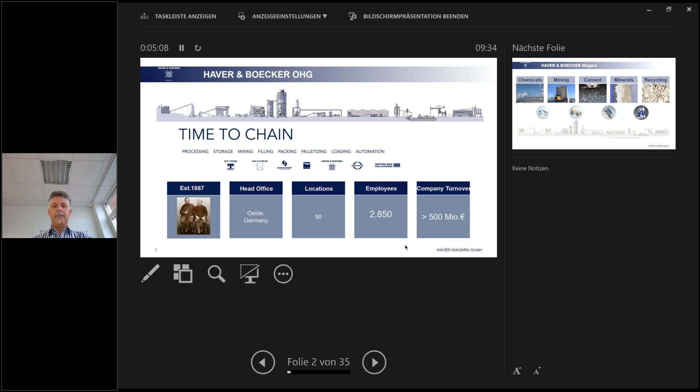We are working in the following areas: chemical and salts, mining, cement, minerals, and recycling. These are the main areas where we supply equipment for. Especially for chemicals, mining, and aggregates, we make this presentation today.

So we want to discuss a little bit about efficiency long time ago. This picture is probably familiar for some of you. We take it from our mathematics books at school. At that time, I asked myself, for what can I need this picture, or for what do I need this? Years later, now I understand why I need this.

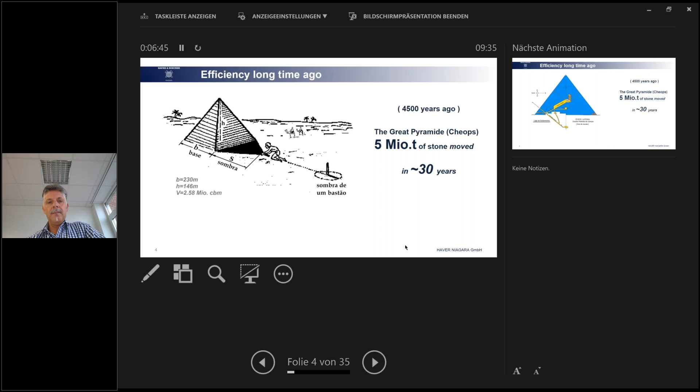4,500 years ago, people built in Egypt the Great Pyramid, the Cheops Pyramid. For that, they used around 5 million tons of stone. They made the pyramid in 30 years. This was really efficient for that time, because the idea was to make, let's say, like a cathedral for the pharaoh.

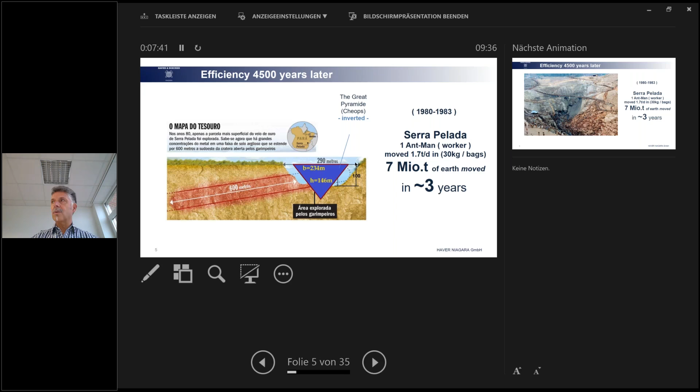4,500 years later, people make another type of cathedrals, let's say. When we take this picture and invert the Cheops pyramid, so it's to scale, the pyramid in that case - people in Brazil, in the 1980s, in 3 years moved the same quantity of material, even more, 7 million tons, in only 3 years. This was also another kind of efficiency, because they used the same tools like the people that built the pyramids - hands, no machinery, nothing. But then they created this big pyramid of material that they cannot use because they only wanted to have the gold. This was made in 3 years.

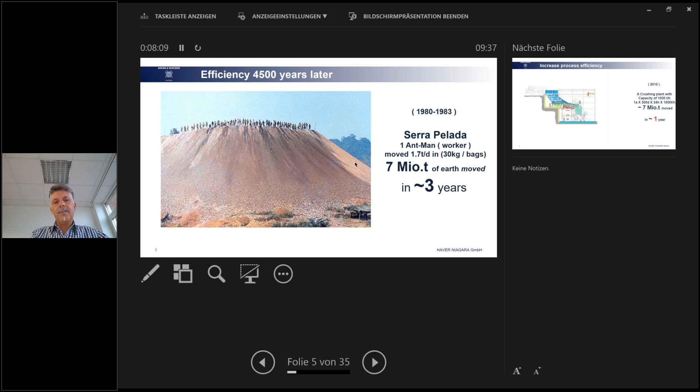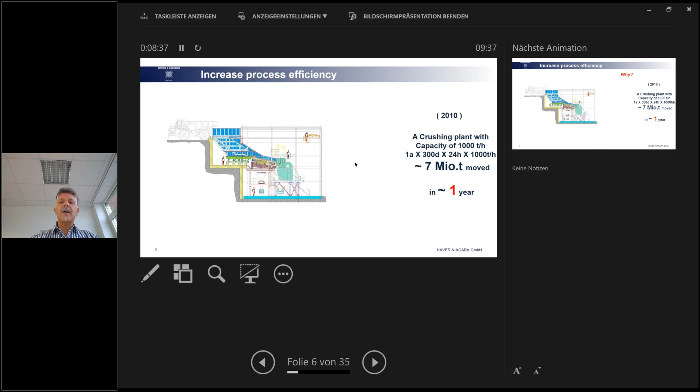Nowadays, we have another kind of efficiency. That means we have plants and machinery that move the same quantity of material in 1 year. So that means efficiency is higher, but we use less manpower and more machines.

Why do we show this picture? It's shown so that you can see that with these big amounts of material that we move, we also create big pyramids worldwide - not only in the Sahara, but also in the north part of the earth and in the south part of the earth. Even this is not a big plant, because 1,000 tons per hour is a small plant in mining scale, but for aggregates it's a big one.

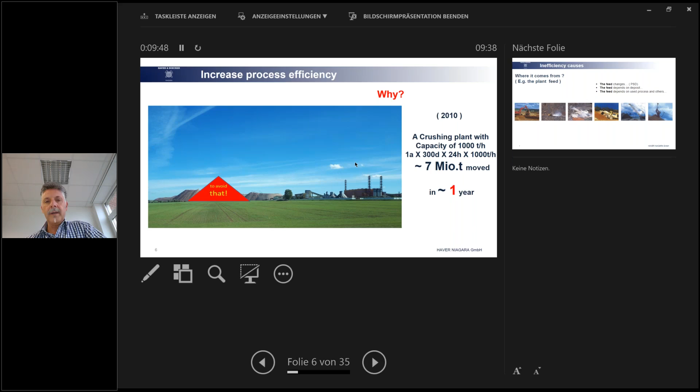So why do we want to increase the efficiency? We want to avoid creating these big stockpiles of material that no one can use. When we see these stockpiles, because we can do nothing with them actually, we have to ask why or where it comes from that the processes are so inefficient. What are the causes for that?

The causes normally come, part of them, for example, from the feed. Depending on the material that comes from the quarry, because the feed changes constantly, the mineral content of the deposits changes also constantly, and the use processes and others are also changing even during operation. This is the reason and causes why we have this big amount of stockpiles of unused material.

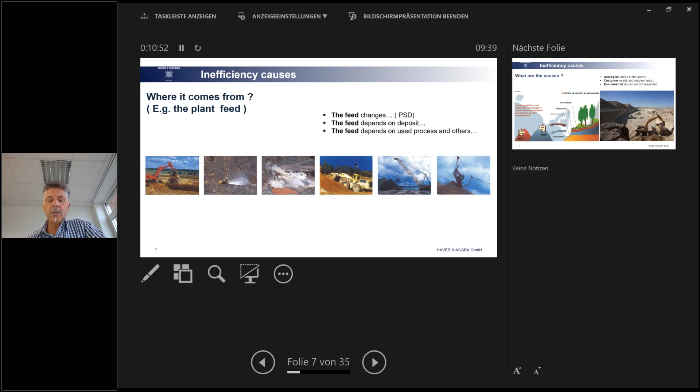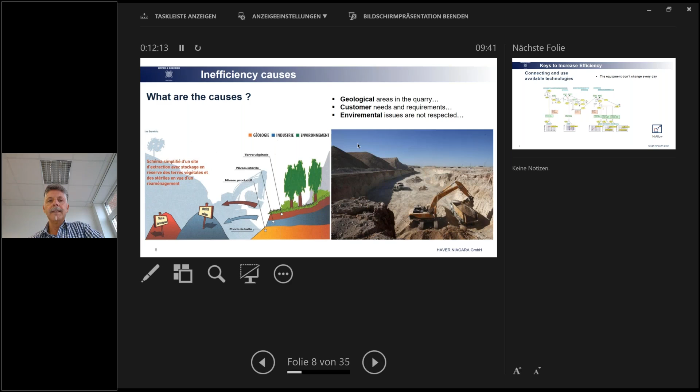So now we come back to part 1 and part 2. I don't know if you had the possibility to follow my colleague, Dr. Ruediger Heinrich, during the presentation of NIAflow. NIAflow is, for us, part 1, because there we show you how to select the machinery for your quarry. This is why we put this picture.

So to come back again - we have a system, a software to calculate the machines for your quarry: screens, crushers, feeders, and so on. The system gives out what materials you can expect to get from your quarry, of course considering your inputs to that.

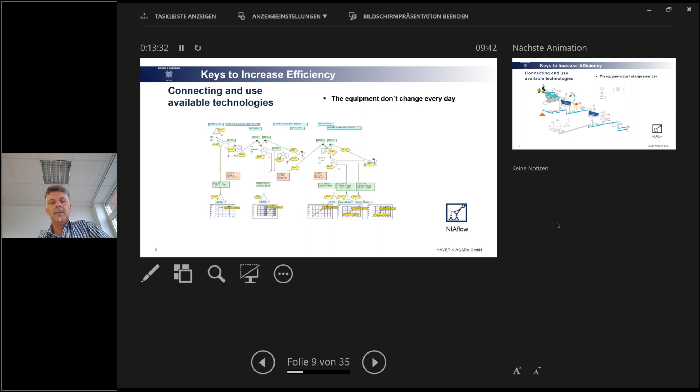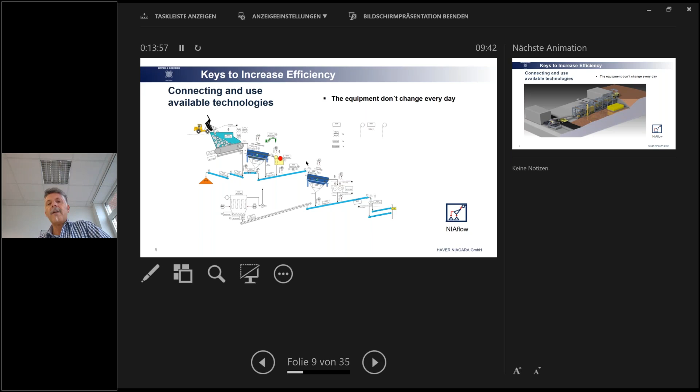After you choose your equipment and design your plant, you choose the right equipment for that - your trucks, your screens, your crushers, filters, conveyors, and so on. All this is equipment you choose when you build your quarry. So after it is built, or you design it, you make at that time the ideal process. You have the ideal quarry, you have the ideal equipment.

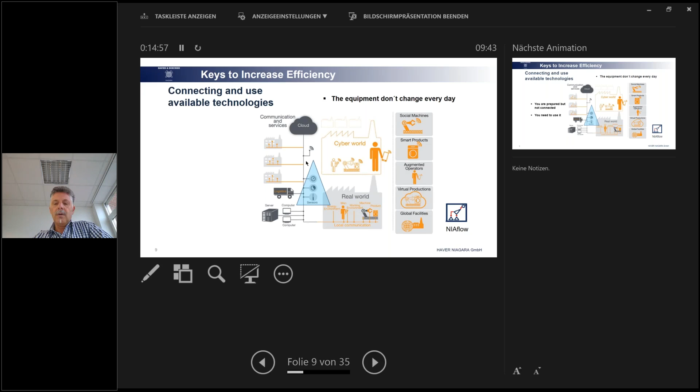So you don't change it every day, it is constant there. Now you have your equipment in your quarry, your feed, your geological issues, and you have a lot of components inside your equipment already installed that you don't use, for example sensors. This is the key we want to use to increase capacity and output of the quarry. So you are prepared but not connected, you need to use it.

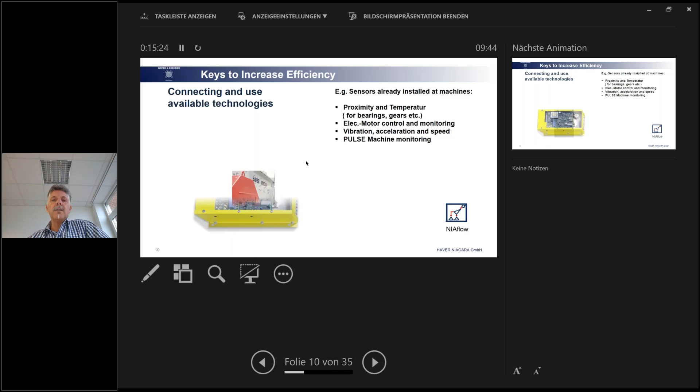What does it mean? When you buy the equipment, you get proximity switches, temperature sensors, electrical controls and monitoring for your machines. You get vibration, acceleration, and speed sensors. All these things you get with your new machines that you choose at the beginning.

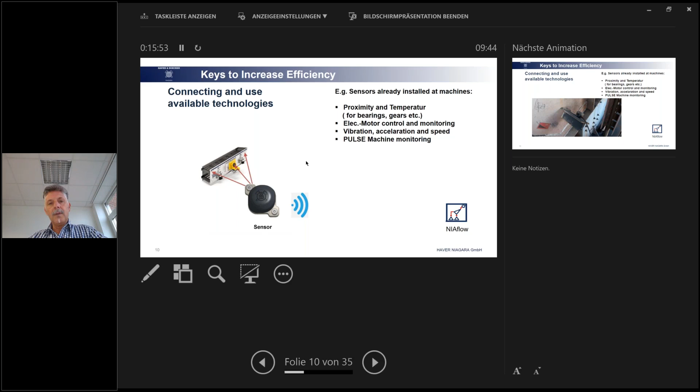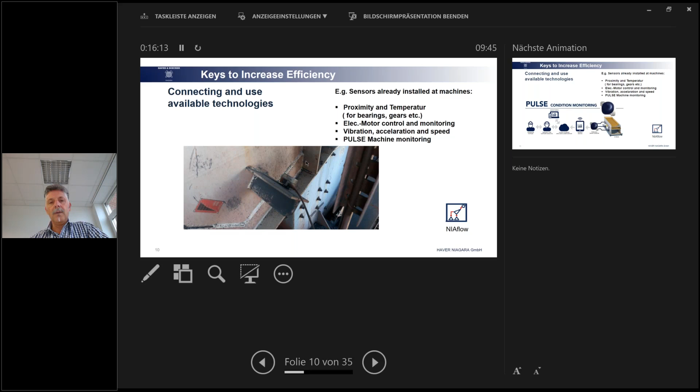Or even, for example, PULSE - this is a system from us, from Haver & Boecker. You get it, you put it outside. This is a picture of a machine running with such a system. So it is not something we only assume, people use it but only for one thing, only for example for vibration. But we can use it for more.

We can use it to increase the efficiency of your plant. How do we make that?

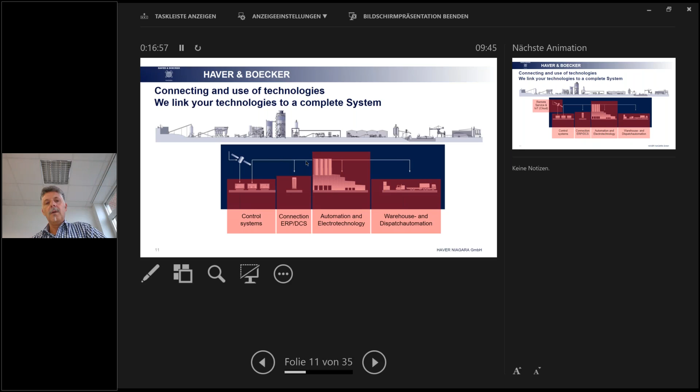Our experts from Haver Automation are able to connect all these installed sensors from your machines to a complete system, electrically, control systems. We can make it in dispatch, not only in the production area, connecting ERPs and DCS. And if the customer wants, we can make it also in remote mode, meaning using a cloud.

But I know clouds are sensitive things, so it depends if people really want to use it or not, because cloud is sensitive because of the data.

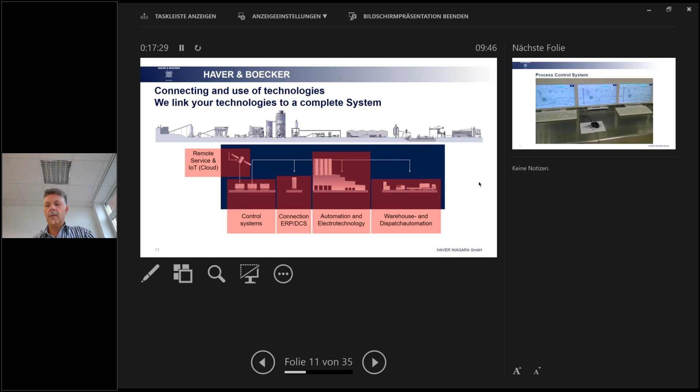So this is a picture that everyone of us sees when it goes in a production area. We see all the machines and what each machine makes on its own, but the machines don't, let's say, speak together.

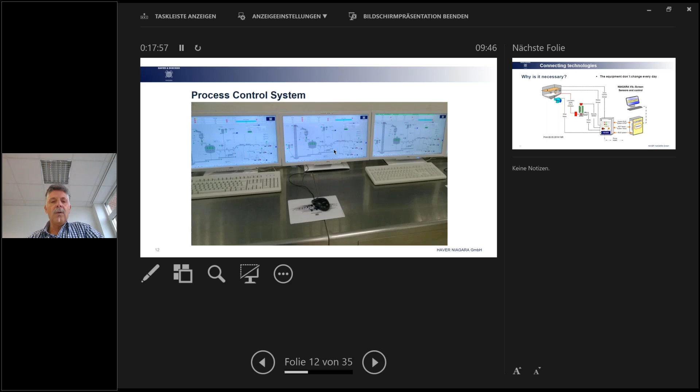So for example, when we supply a screen, this is the amount of things we usually supply with the machine, even if the customer wants to use it or not. These kind of things are state of the art, so we supply it together with the machine.

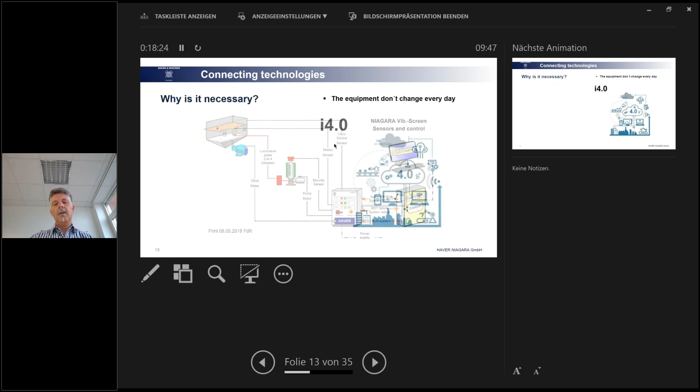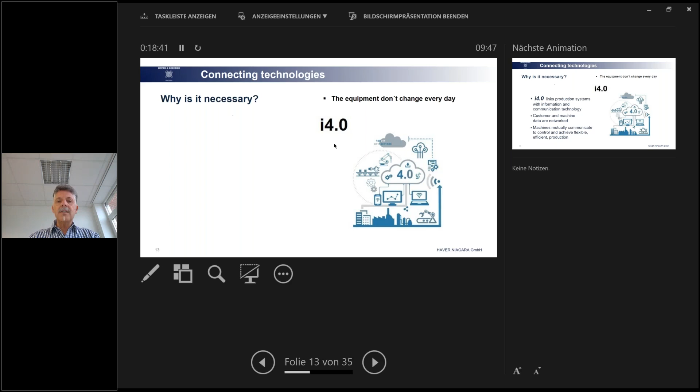Now we came to the idea of i4.0. Why is it necessary? It's necessary so that the machines can, let's say, speak together. This is the idea: you link your machines so that the crusher knows what the screening machine is doing, and the machine knows what the belt conveyor is doing.

So why do we have to use it? We should use it because, for example, the ROM from the quarry changes frequently, and this decreases your output on material if it goes in the wrong direction. The reject increases, the quantity of lost material increases also, so the stockpiles become bigger and bigger, and we are back to the pyramids.

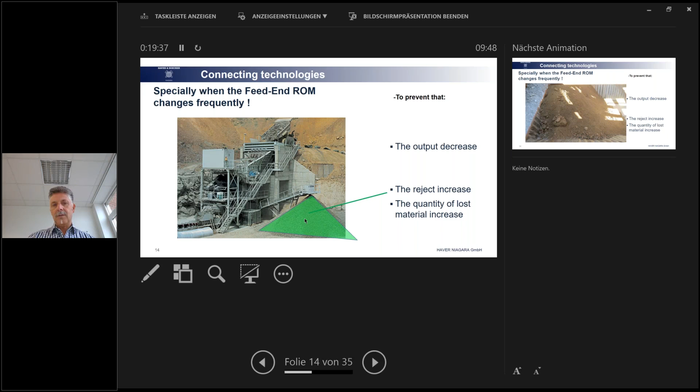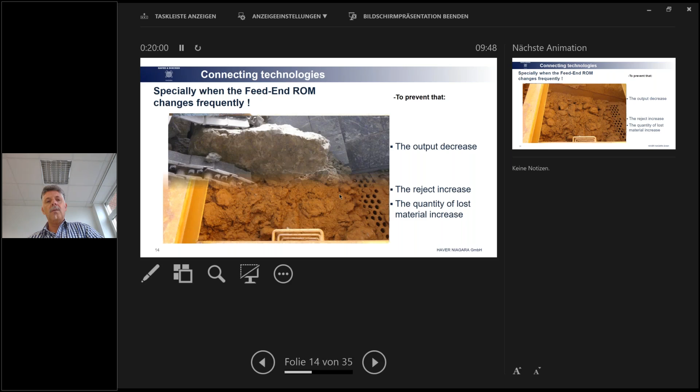Why is it so? In these pictures we can see it. Sometimes we get this from the quarry, other days we get that - a big amount of big stones and only a small amount of fine materials. In rainy seasons in some areas of the world, especially in mining, we get this kind of material - it looks more like a pudding than material for processing at a quarry.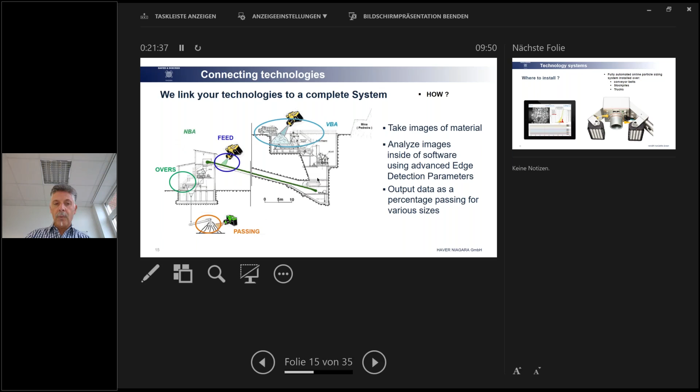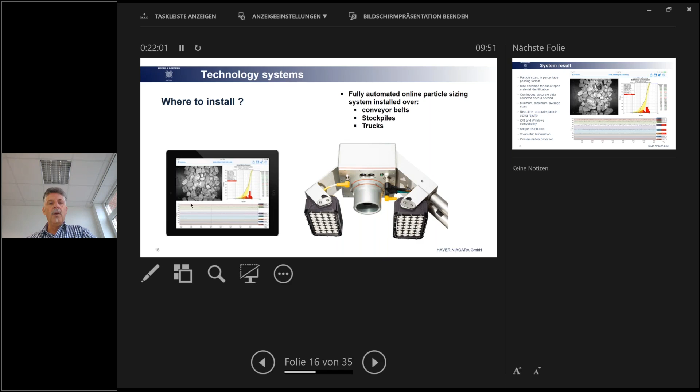So where can we install this type of camera? We can install it over belt conveyors, over stockpiles, or even over trucks, chutes, and so on. So we have the camera, we have a light, and we look at the material. What do we get out? We get out particle size.

We can identify some materials. We get out the maximum and minimum averages of the sizes. We get these pictures in real time, meaning direct. We can provide it for other issues in the process. We have shape distribution of the material, volumetric information, and even contaminations, for example big pieces of wood or things like that.

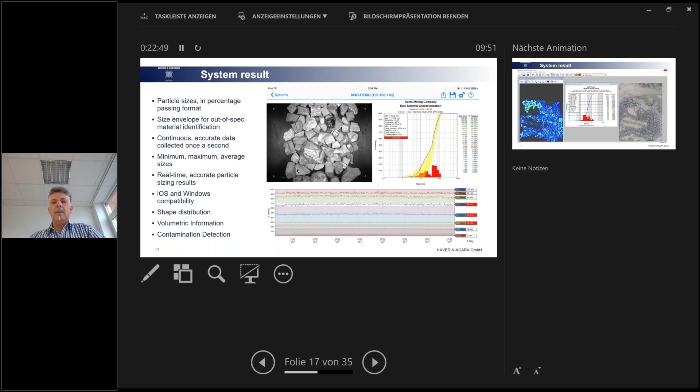So here we have a picture, for example, of a stockpile. Here you have your loader, and this is the picture of what the camera sees.

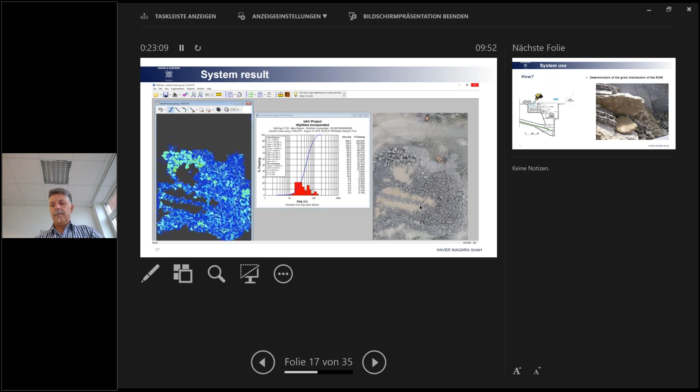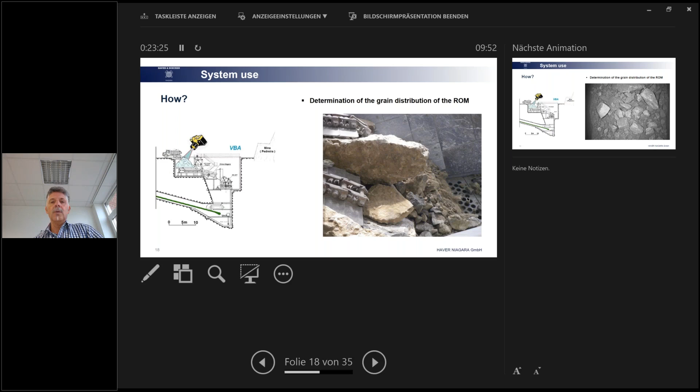So again, we take the camera and go back to our feeding point. There we want to use this so that we know what comes into the process. This analyzing, and then we get out the curves, the distribution curves of the material that comes into the quarry.

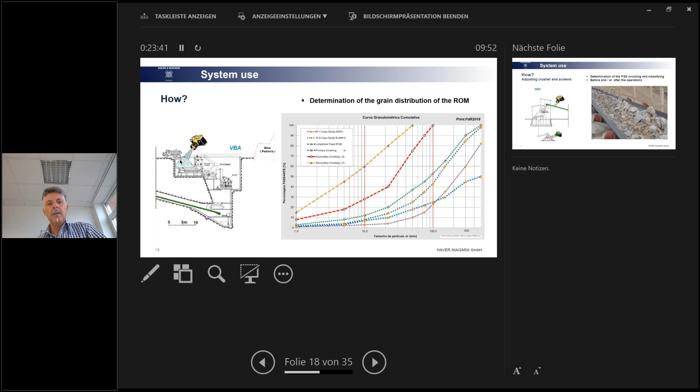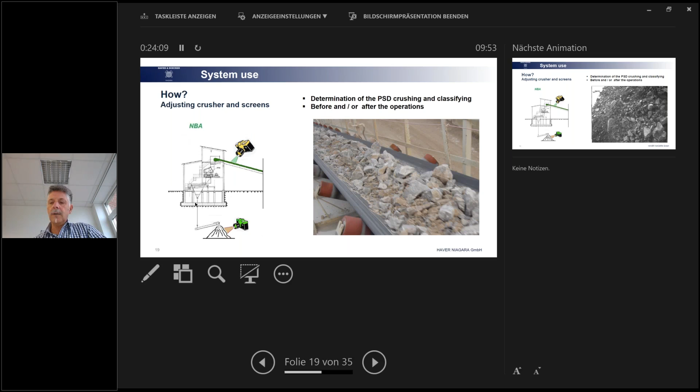After the crushing, for example, after the first or primary crushing, we analyze again with another camera what's going on the belt conveyor that comes from the crusher, from the primary crushing station, before it goes to the secondary and to final screening. Again, we see, okay, we get another distribution.

So this is our first step, what we want to do, so that we can control and see what you get out of your plant, if you are inside, let's say, of the limits. We can make this control before, for example, screening, or even after the screening.

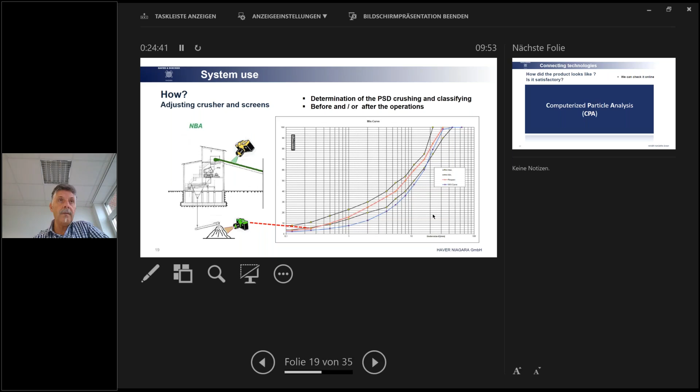After we have done this and seen what's going on before we have, let's say, one operation step, we can recheck how the material really looks like.

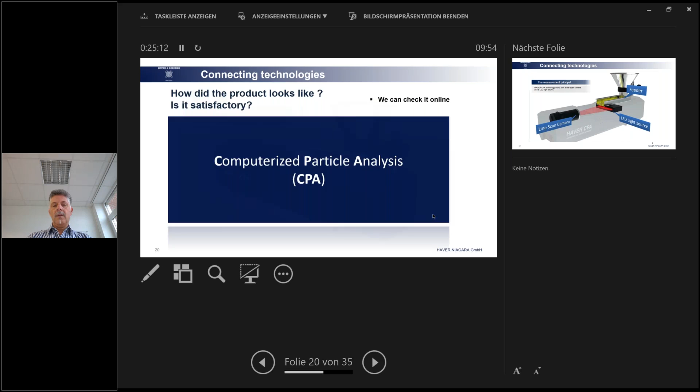This we can do, for example, with our system CPA. So CPA, what is this? CPA is a system that is not direct over the belt conveyor or over the chute. It is a system that can be used in a laboratory or even online.

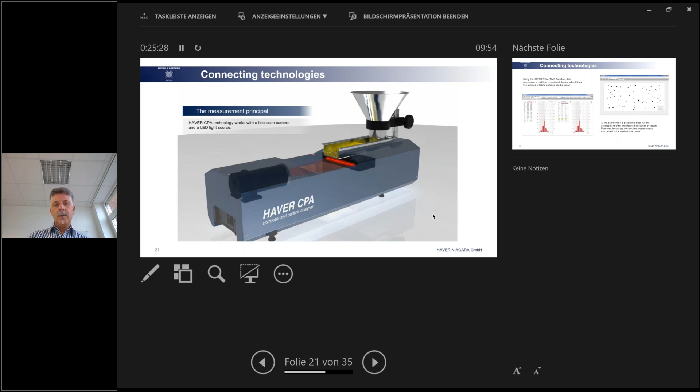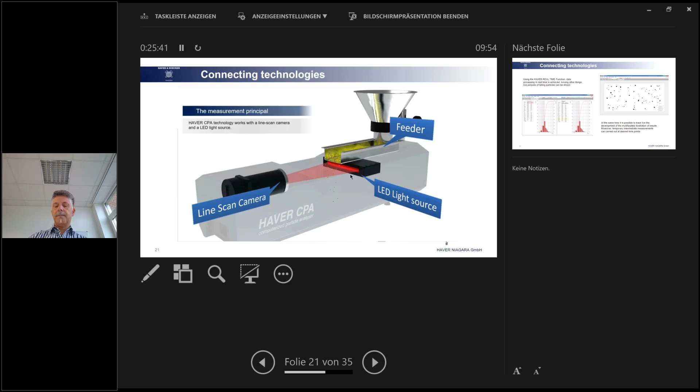So we measure the material. We get a small amount of material. Again we take pictures, but then in small scale, and we see what happens. Why do we do this? We do this again to get out the distribution, the material distribution, PSD curves, but also to see what is the shape of the material - it is round, it's square, it's oblong.

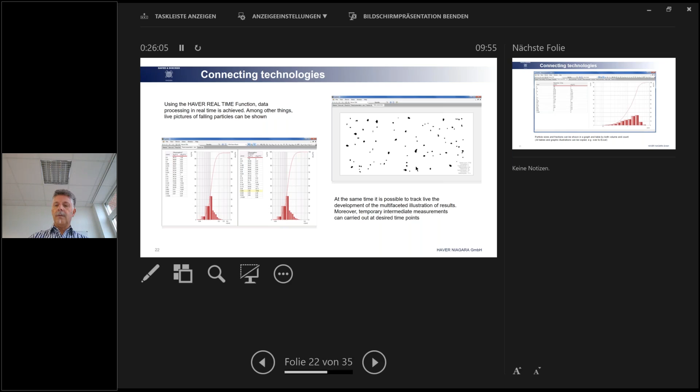So all these things we can get out of this system, and then compare it with what we want to have. What are the advantages? Advantages are that we can make this and control the process direct online or even in a laboratory at short time. This is the advantage of this system.

So now this was the theory, but of course we came back to real cases. So for that we choose a case that we made in Switzerland years ago. What was the idea? The idea was to increase the output of track ballast, adjust the capacity of crushed sand, and provide high quality products.

So these were the points that the customer wanted to have, especially regarding track ballast and quality. So this is something, this is together. You must have the quality, otherwise you cannot sell your track ballast to the companies that, let's say, make new tracks or even recycle the material from the tracks.

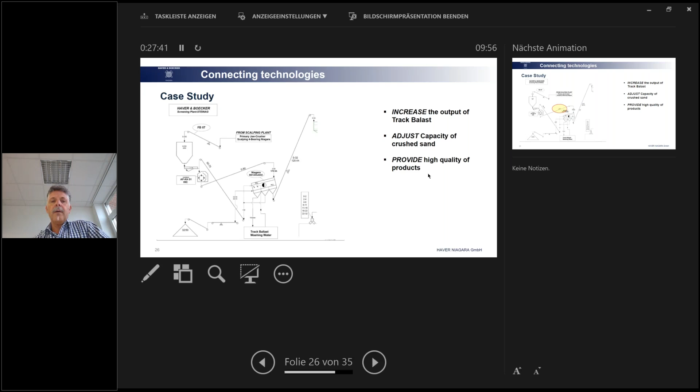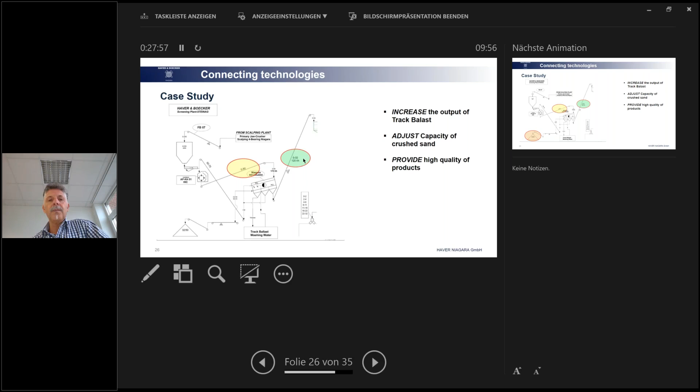So we look at the area of the track ballast. So we get from the first step of crushing a 0-80. We only want to have for sand production the 0-32. Our track ballast is the 32-50. So this, the track ballast, is the material where you can get the money out of the quarry, because sand - there are also a lot of other producers around this quarry.

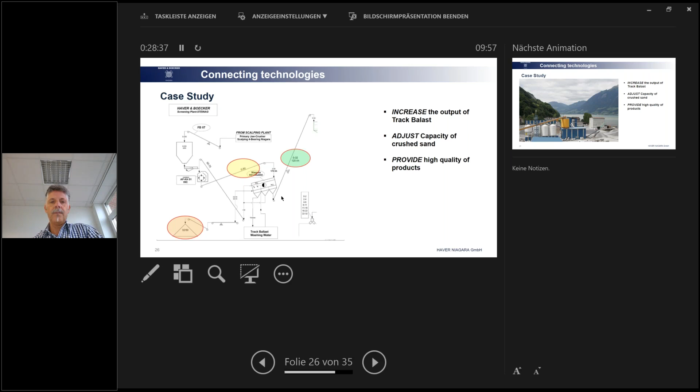So here we have a picture of the quarry. So if we go back, you have the silo inside of the house, there is the crusher and also the screens. So we have the silo, and inside we have the crusher and the screen, let's say for track ballast.

Outside we have the stockpile, again our pyramid of material. Let's say it's not really a pyramid, but okay, it looks like it, of the track ballast.

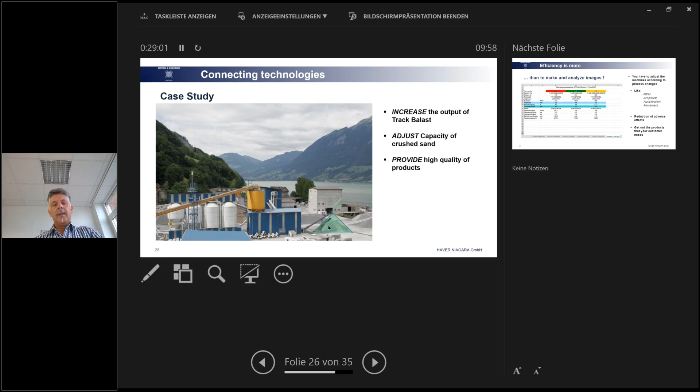So the idea of analyzing images, we do there. So we check the material, analyzing the images, but efficiency is more than that. It's not only analyzing the images and saying, oh, okay, the crusher must run faster. Also, the screens must be adjusted. So that means we have it here.

What happens? If we play with the crusher, in that case, this case study, then we are, let's say, facing problems on the screening area, especially also on the sand side, because sometimes it comes too much sand, sometimes it was not enough sand, or even the quality was not okay. Because the screens, in that case, there are 3 screens screening this material, and not all screens work in the ideal conditions according to the, let's say, the game that the customer plays with the crusher.

So for that, we make a long time study. Long time, it means 1 month, to see what happens when they modify the crusher, to see how to adjust, let's say, the screens. So we started in February, and then we go till March, checking different possibilities to adjust the machines so that all machines work on perfect conditions, even when the customer modifies the crusher.

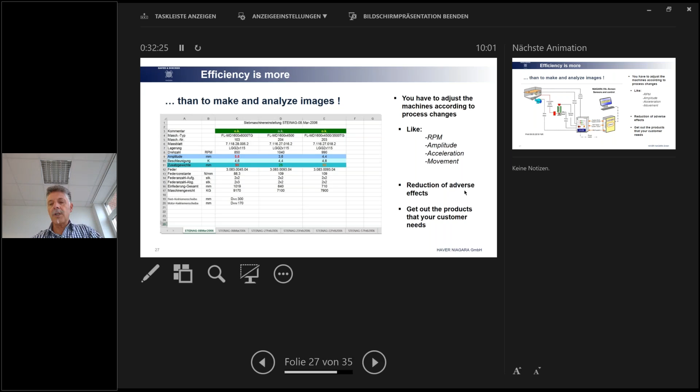This we need to do to prevent or reduce adverse effects on the screening area when we change or modify parameters, for example on the crushing area. Because what we want is to get products that your customers need. And again, we are back to this picture. So it's not only to supply the screen with a motor, we should use all these sensors included to adjust the machine, to adapt it to the process.

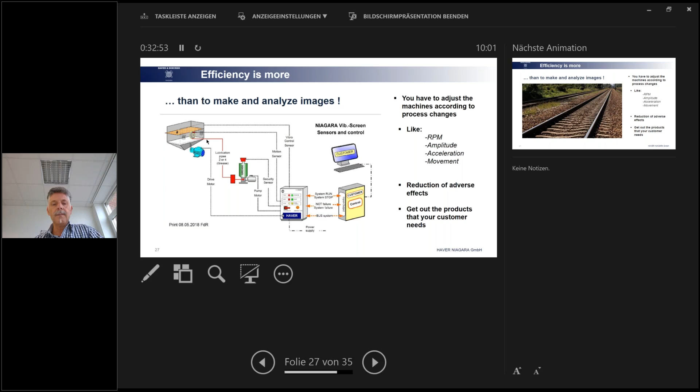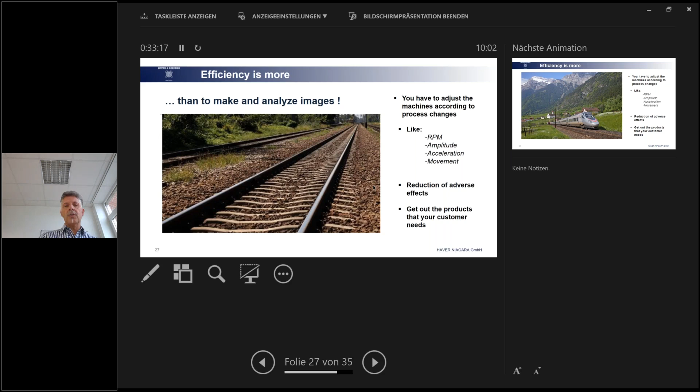What is the main point? The main point is really to get out, in that case in Switzerland, this material. Every one of us knows it or sees it, but it is a very, very important product. And if it is not correct and not good enough, you cannot use this type of trains. So you see, it seems it's only crushed stone. Yes, it is crushed stone, but it is important how this product looks, even to drive with 300 or more kilometers per hour.

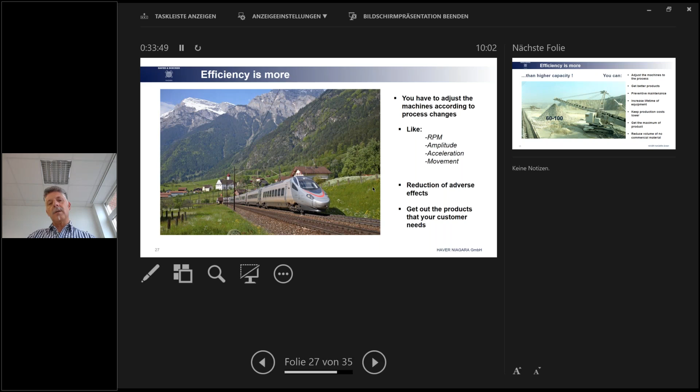So this was an example where we use this technology and use the sensors installed at the machine to adapt it to the process.

So efficiency is more than higher capacity, that's what we want to say. Adjusting the machines is needed to get better products, to have good and preventive maintenance, increase the lifetime of the equipment, because it makes no sense to accelerate a screen up to 6, 7, or 8G and every month be changing bearings and other parts. So the machines should run with the possibilities given by the technology, keep production costs lower, get maximum product, and reduce the volume of non-commercial material.

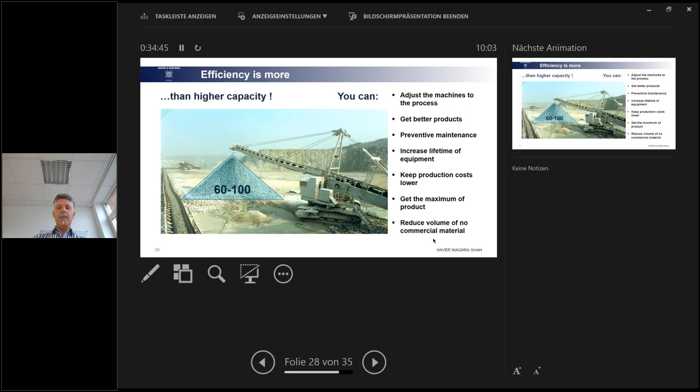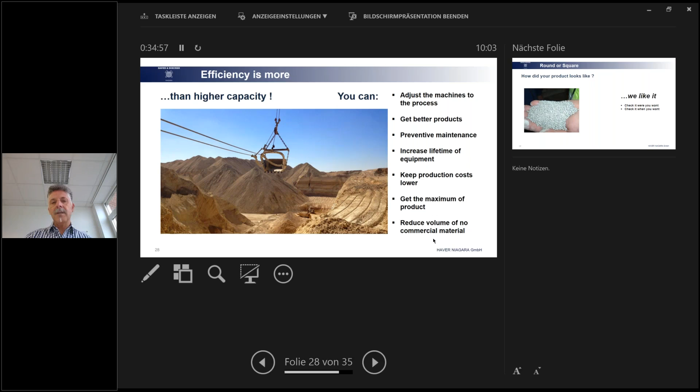Okay, now we are back to my pyramid. So again, we see it here. If you don't use the possibilities given by the technology, your pyramids get bigger and bigger. So it doesn't matter for us if the product is round or square, we can check even round or square products. For the technology, it doesn't matter, especially for the technology to make images during the process.

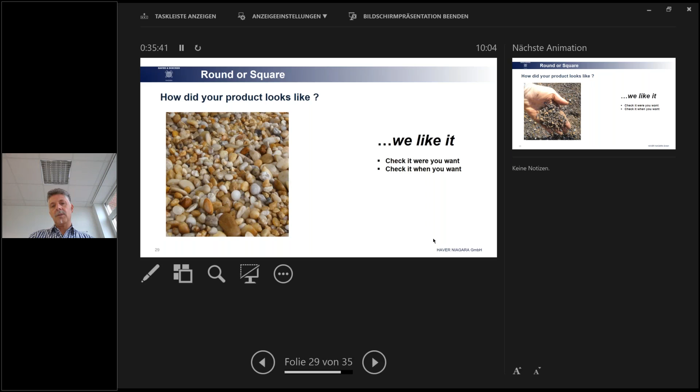So these are some pictures of products that we already control and manufacture, and check the process with the technology and with the systems. So you see, it doesn't matter what you have, we can use the technology, online or even offline. Offline means we take it from here, from the storage, bring it to the laboratory and check it there.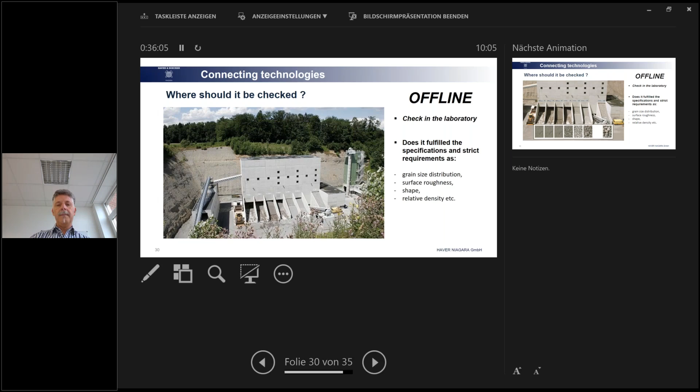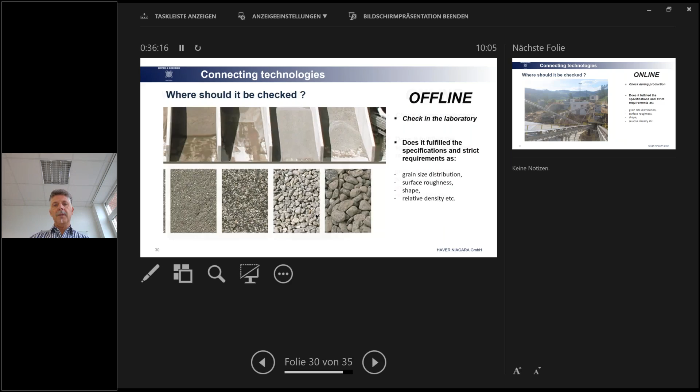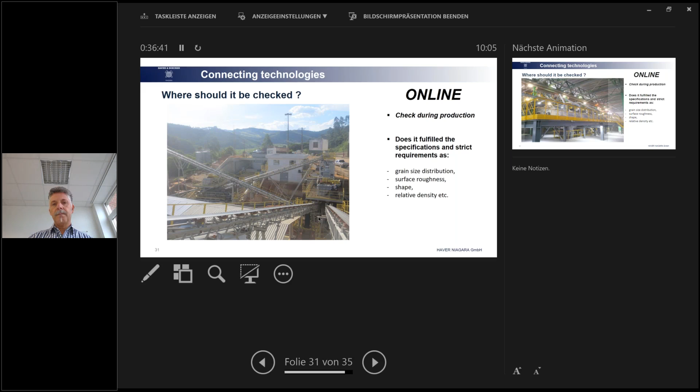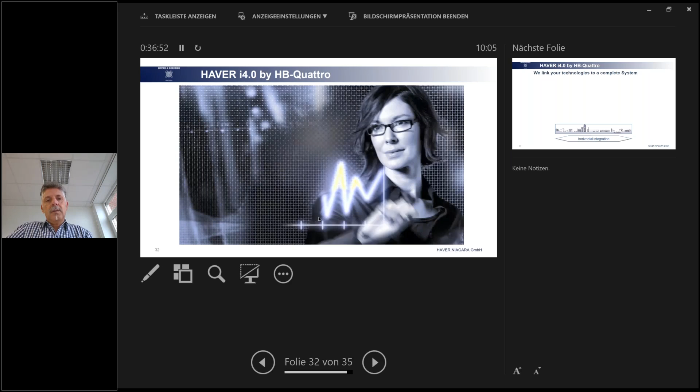Or install the camera over the storage and check it. So this is one possibility. The other, the online possibility, is to use it direct during the production of the materials, and not only later when they are in boxes, in silos, or even in stockpiles. Again, we see it here, online systems. How can we do this? For this, we want to show you a small, short movie of what is possible to do.

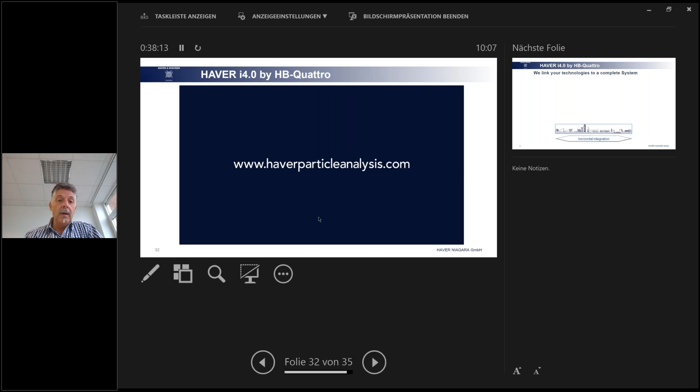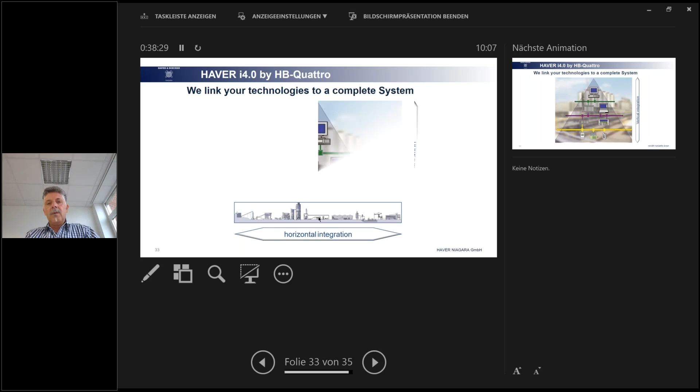So this was a small movie to show what is possible to do online, direct during production. And it doesn't matter for us if you want to make horizontal integration in your quarry, in your factories, in your production lines, or if you want to make vertical integration. It doesn't matter, we can do both. We have the technologies inside and we have the expertise for that.

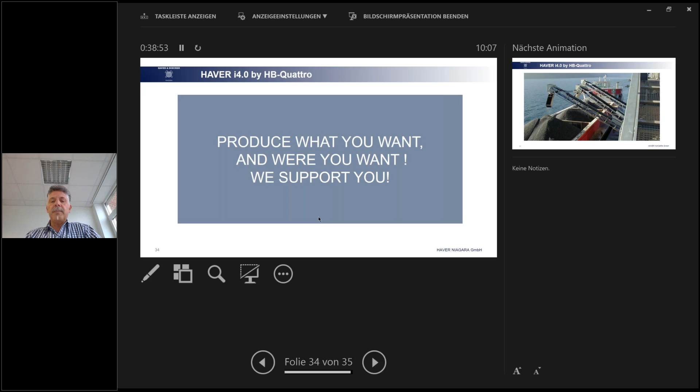So produce what you want and where you want. We will support you with our different technologies and our expertise for that. So this is also a picture of production, making products direct where you have your resources. You see, it is direct in the lake where you get your material from, you crush it, you screen it, but you don't want to keep big amounts of material back in the lake because you spend a lot of money to get it from the lake.